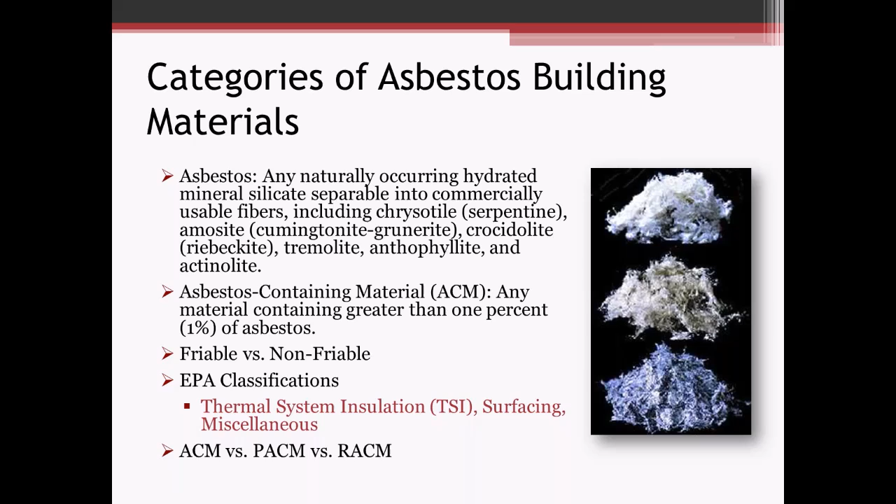It's bagged, it's transported in sealed containers, but a lot of times it goes to a landfill that you're going to have C&D waste as. Whereas your regulated asbestos-containing materials, that friable material or materials that could be or will be rendered friable, that goes out as a whole separate entity, and usually a higher cost associated with that disposal because there's only certain landfills. You've got a lesser amount of landfills that will accept that.

So further into the regulations, the background on asbestos materials, rules and regulations that exist out there. I'm not going to go too in depth with what is there, but as you can see on the federal side, we have AHERA, the Asbestos Hazard Emergency Response Act. That pertains primarily to K through 12 schools and dictates how K through 12 schools need to manage their asbestos,

develop asbestos management plans, periodic surveillance, triennial inspections to make sure that if they do have asbestos materials in their buildings, they're being maintained, they're not damaged, they're not deteriorated, they're in a condition that you're not going to have exposure to the occupants.

NESHAPs, the National Emission Standards for Hazardous Air Pollutants. That's the EPA regulation for managing asbestos. So that talks about how to abate your asbestos, how to handle it, how to dispose of it, setting up inspections, all that criteria would fall under those NESHAPs. Then finally, on the federal level, OSHA has their regulations.

The interesting thing to point out here, as I mentioned before, with the trace asbestos, OSHA does have some protocol out there. They don't really distinguish between how much asbestos you have. If you do have asbestos in your material, the regulations should still really apply there. Whereas the other ones, we're looking at that greater than 1%.

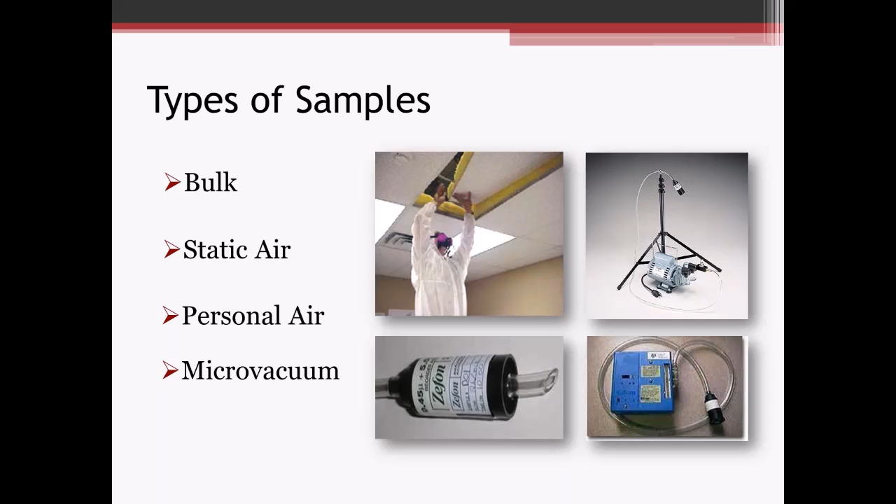The trouble with a micro vacuum sample is, as opposed to the other samples where you have number values, this is basically a presence absence. If you have a presence, then you may have an issue. If you have an absence, then you're good. But if it's present, it's more of a qualitative analysis or quantification. So that'll bring us to question 1.

Okay, Cheyenne, go ahead. Okay, so this first question should be, what is asbestos-containing material? And if you answered B, any material containing greater than 1% of asbestos, then you are correct and well on your way for passing this course.

Okay, so moving into an incidental disturbance. So what do we talk about as far as an incidental disturbance? The definition here is the unintentional disturbance of ACM, PACM, or asbestos material. It doesn't really matter how the disturbance occurred. It's a matter of if you've got disturbed material, you've got potential debris, potential fibers in the area, that represents a concern, especially in the building. You've got building occupants that may be in the area affected. You need to do something to address those conditions.

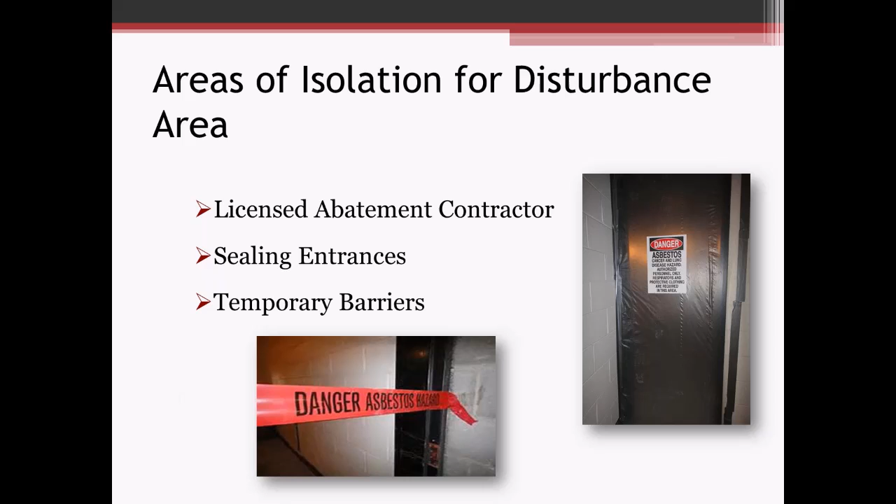So how do we assess these incidental disturbances? At a minimum, you need a visual assessment. You need to know what occurred, evaluate how it may have occurred, where that debris may have impacted. Just visually assess that area and define your extents based on where debris is present. This needs to be done through a certified building inspector, certified through New York State Department of Labor. These are the same people that would do the surveys, do sampling, do assessments. They're the ones that have to go out there and do that visual assessment.

They're going to visually identify the extent of that debris, and they may also establish a sampling plan. So if it's not necessarily a cut and dry, yeah, we see debris here, we're going to close off this room, clean up the whole room, and do it that way. If it's a large warehouse area and they want to maybe limit it to a certain area, they may look at doing some bulk samples, air samples, to say, okay, we can contain it to just this 100 square foot area and not have to shut down the whole operation in that area.

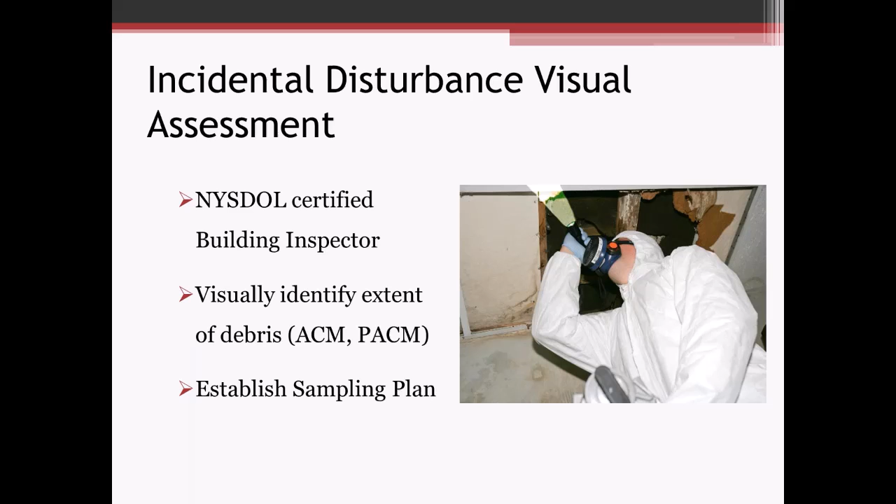You're kind of left to considering that all as asbestos area and abating the entirety of it, just because there's so much going on there, and you can't really tell for sure if this is current, old, historical, whatnot. So bulk sampling isn't useful in every situation, but in a lot of situations it can provide benefits to limit your area of disturbance.

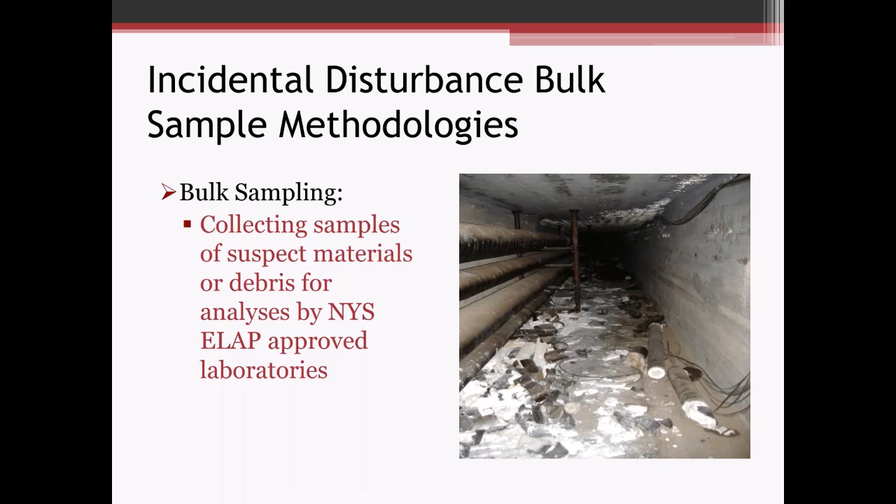You can also consider micro vacuum sampling. This would be a little more common if you're in like a commercial office type setting where you don't have a lot of debris, where you can get bulk debris samples. But you do want to show that you've done a thorough assessment. You've sampled surfaces to indicate, yeah, we do feel the debris is contained here. We've got this data that shows we did some sampling around the area and we're not seeing anything there. So we feel confident that if we clean up this area, we've taken care of and addressed the situation.

And what you're doing with those micro vacuum samples, you're using horizontal surfaces. We're not sampling vertical surfaces. We're concerned with where dust might settle out. So we want to look at those horizontal surfaces. And then also maybe you're selecting representative intervals, whether it's 1 foot out, 2 foot out, 5 foot out, different directions, depending on where you want to establish your extents of contamination. If you've got a wall in one direction and it's 2 feet away, it probably doesn't make much sense to sample in that direction. You can use that wall as your barrier, and that'll be part of your work area when you set up your containment.

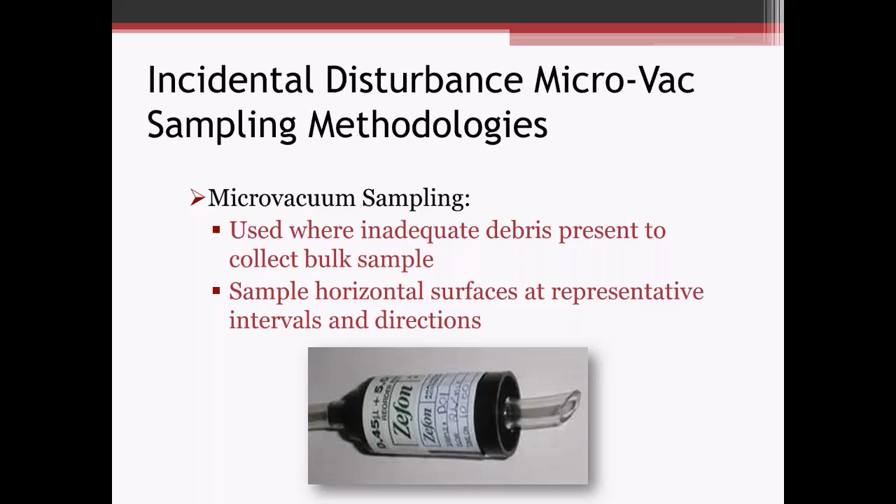The other sampling that can be done is some static air samples. Now, aside from what we had talked about earlier, which is the bulk, the building inspector would do all those previous bulk sampling and visual assessment. These static air samples, if you do decide or elect to do this as part of your assessment, you do need a certified asbestos project air sampling technician to collect those samples. A lot of times, if we're doing the air sample, we're looking at doing 5 air samples within the area of concern, 5 air samples outside the area of concern, and then we do the TEM analysis, the transmission electron microscopy.

What this number gives us is flexibility. This is typical for what you would do for a large project area type clearance, 5 air samples in and out. So that allows us, if we do end up with a large incidental disturbance, okay, we collected 5 samples in and out. It justifies that we did due diligence. We didn't just collect 1 sample and call it a day if we do decide to do that air sampling.

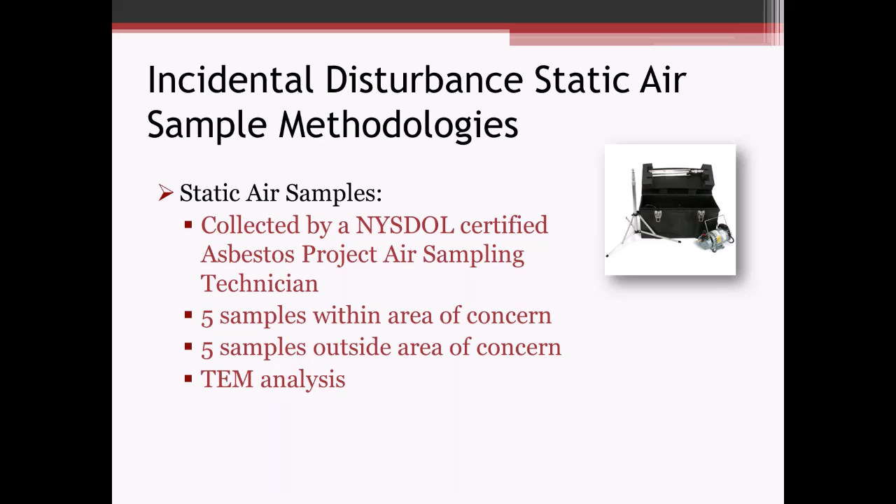And then that TEM analysis, the value of that is the laboratory can analyze specifically for asbestos fibers. They're not going to be counting fibers that might be non-asbestos related, whereas another analysis, the PCM analysis, would count all fibers in a certain range. Whereas this one says what we analyzed and told you for those counts is asbestos. So you're dealing with asbestos if it's detected there. And if it's not, then it allows you to say, okay, we're looking pretty good as far as the air quality in those immediately sampled areas.

All right, so that brings us to question number 2. Go ahead and continue, Cheyenne.

Okay, thank you. Question number 2 is who performs the visual assessment to identify the extent of debris from an incidental disturbance? And that answer would be C, the New York State DOL certified building inspector.

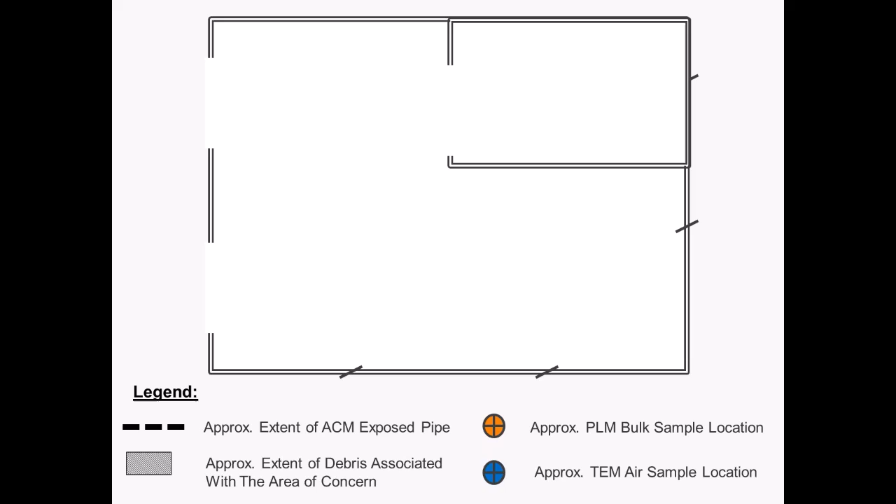All right, so to kind of show a graphic of what we just went over as far as how an assessment generally occurs, here's a scenario where we have a room. Say in this room we have an exposed pipe that has ACM on it, so this would be something with pipe insulation.

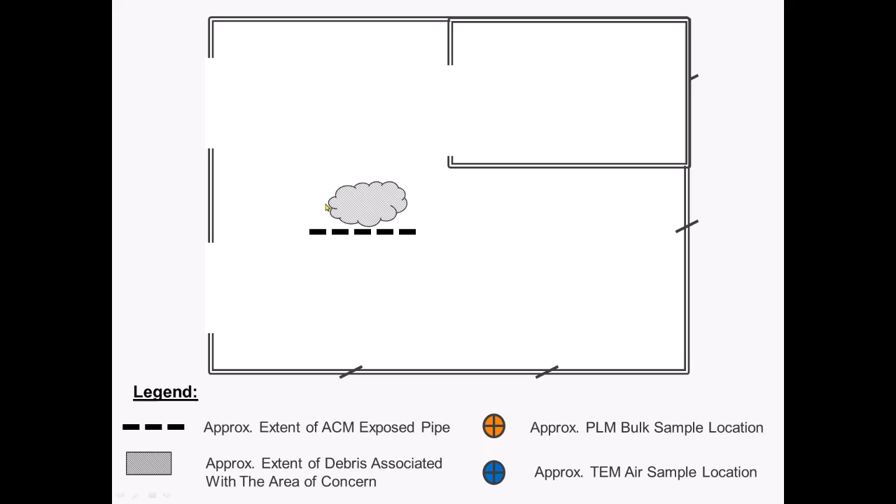And then we're going to say something occurred, an incidental disturbance, and we have some debris. Visually assess it. This is kind of where we're seeing all the debris had landed. It's a large room, so we're looking at defining the extent of contamination, not having to clean up this entire area. Maybe we can just worry about this area. So going out, collecting some bulk samples at specified intervals in each direction, to determine if we've got any debris laying around this area that we can't see.

And then doing our air samples. In this scenario, these are our 5 inside the work area air samples, and then the 5 outside the work area air samples. As you can see, we're deducing that we may be limited to just here. So these are our inside work area air samples, and these are the outside. Now, if for some odd reason our area ends up being way out here, these end up becoming inside work area samples, but you do have to make some sort of judgment and determination when you're out there to select your locations anyhow.

So we send these samples to the laboratory. A lot of times we're going to tell the laboratory, let's analyze these bulk samples first and analyze our air samples, see what we got with those before we start looking further outward. Say our laboratory comes back and we got hits on these 2 bulk samples, all our airs are clean, these other 2 bulk samples are clean. So then we go back to the lab and say, we're still kind of up in the air on these direct locations. Can we also get these 2 samples analyzed?

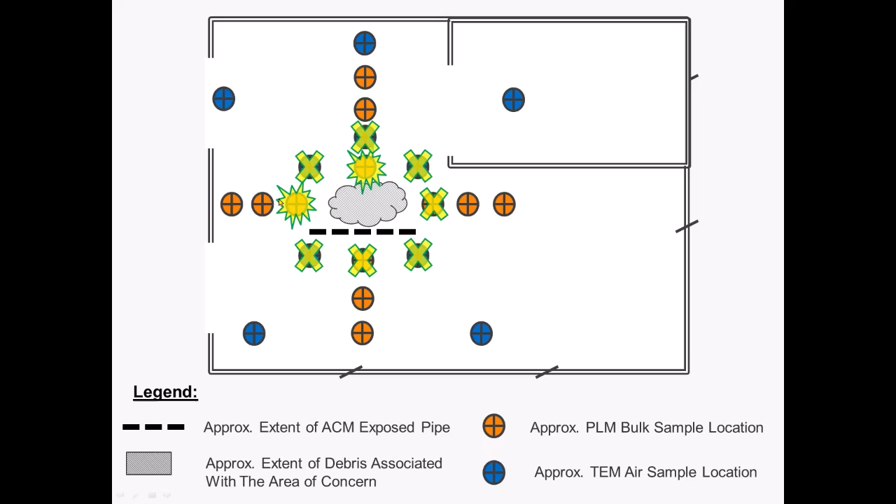Get those analyzed, those come back clean, great. We've established our extent of contamination. We can tell the owner and the contractor, look, this is what we're looking to clean up. This is what we're going to put in our variance to clean it up. And then we can proceed with that extent of contamination.

Now, again, if this wall is pretty close, more than likely it may be easier just to extend your work area here rather than try to set up a containment barrier here. You can actually use this wall system. That little extra to clean up probably isn't going to make or break anything. So again, use your best judgment and work with the owner to see what makes sense to do for a cleanup.

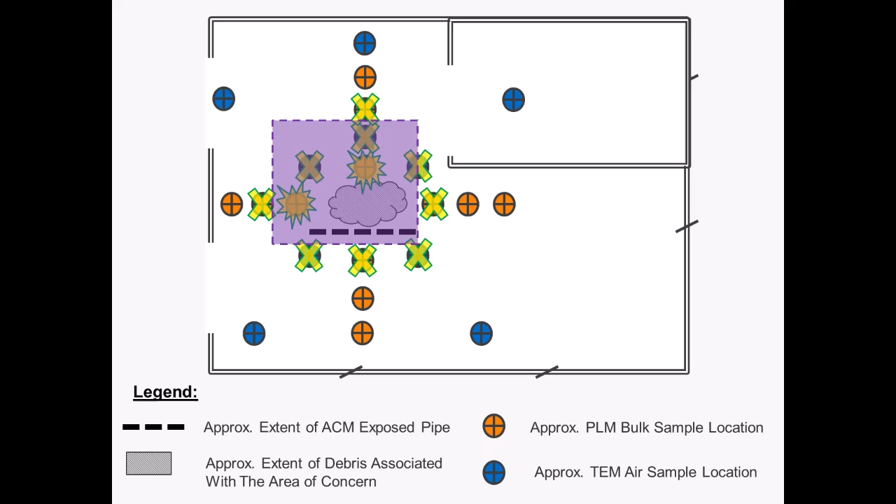So when we transition into, okay, we've done the assessment, we know what we're going to have to clean up and where, now we've got to look into, do we need a site-specific variance? As far as the applicability of a site-specific variance, if you look at Code Rule 56, any person or firm subject to Code Rule 56 may petition the Department of Labor for a site-specific variance from limited provisions of the Code Rule on the grounds that there are practical difficulties or unnecessary hardship in carrying out those provisions. In other words, anything you're looking to do on a site that isn't totally compliant with Code Rule 56 requires a variance.

When we're dealing with incidental disturbances, it is typically required. The only scenario where it isn't is a minor incidental disturbance, because Code Rule 56 covers how you address a minor sized incidental disturbance. A minor sized area is 10 square feet or less. And with incidental disturbance, we're not dealing with the amount of material that was disturbed, we're dealing with the extent of impact from the debris. As you can imagine, 10 square feet isn't a very large area. A lot of times these incidental disturbances exceed that 10 square foot minor size criteria, so there is a requirement for that site-specific variance.

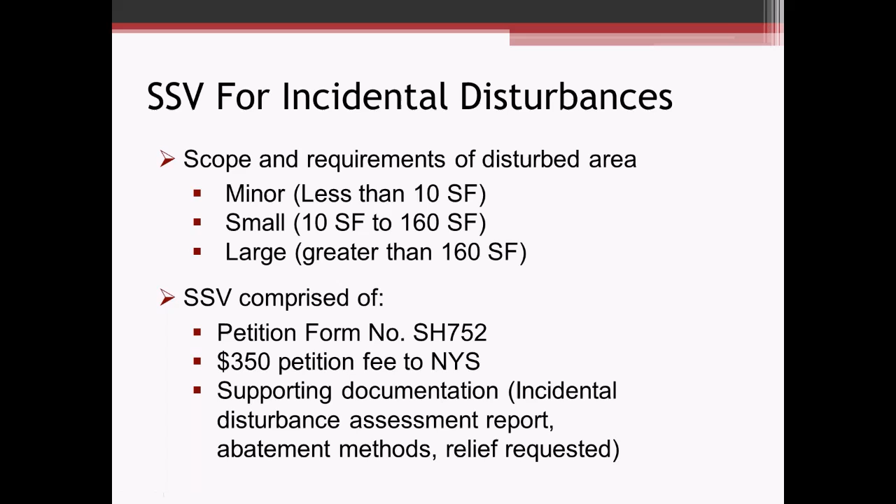And then if you have any supporting documentation, as you'll see on the next slide with the form, there is limited room to explain everything. So a lot of times you're going to have additional add-ons, whether it be the incidental disturbance assessment report, abatement methods laid out more specifically, or a description of the relief being requested. That might be provided in supporting documentation.

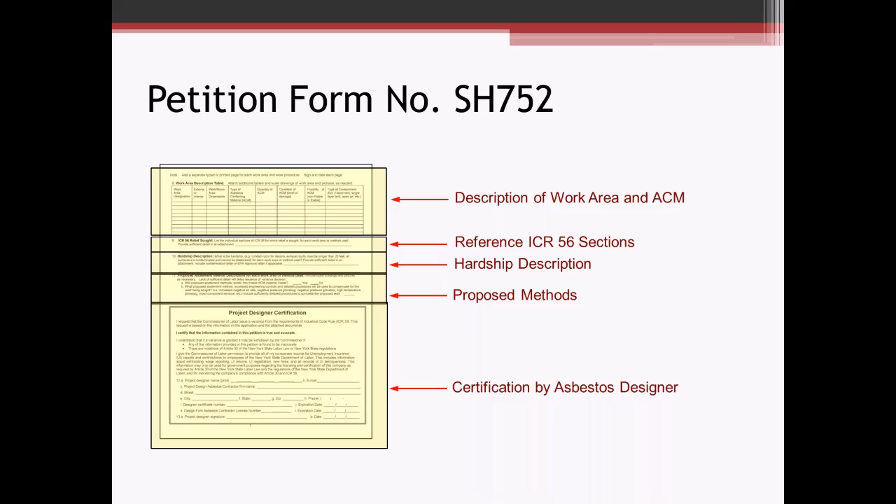What your proposed methods are. Again, limited room here; you're probably going to see this on a separate sheet. This is what we're looking to do. Lay out the abatement process for them so they can see you're using practical methods and means to accomplish the cleanup. And then your certification by that asbestos designer, with the license number, cert number, and all that to verify that they are a certified asbestos designer.

And that brings us to question number 3.

Continue, Cheyenne. Okay, so question number 3 was who reviews and approves petitions for asbestos site-specific variances in New York State? That was on one of the slides. I believe I forgot to specifically state it, but it was there. So if you got it right, kudos to you. That is D, the New York State Department of Labor Engineering Services Unit.

Okay, so when we submit that site-specific variance, it goes to the New York State Department of Labor, that engineering services unit. They'll take a review of it, they may have questions, clarifications. They may make additional conditions on the variance itself. Generally, when you're looking at an emergency variance, usually they come back within a day or two. I rarely see them come back beyond a 3-day period now. It's usually the same day, next day, or maybe the day following. So they are pretty proficient at getting those emergency variances reviewed and out the door.

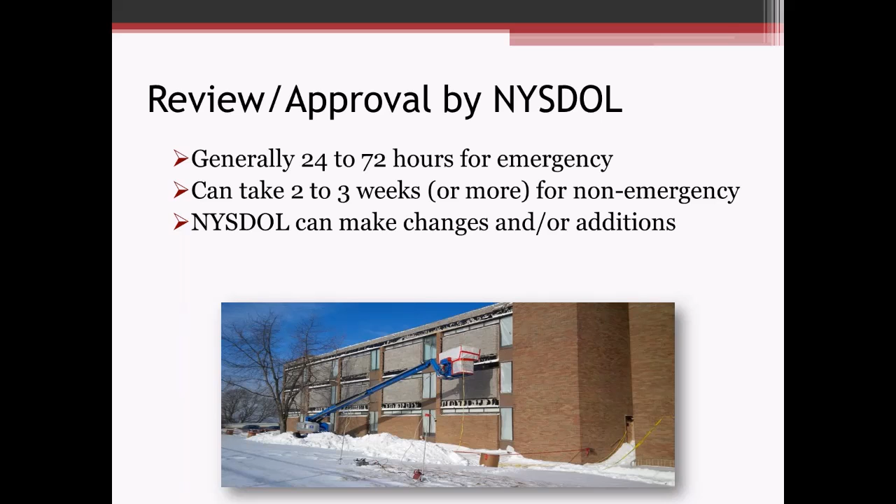The Department of Labor can make changes and or additions, so a lot of times with certain variances, they'll add conditions to it. When they add those, those become part of the variance and they become applicable for compliance. So you want to make sure when you receive your variance back, you read and understand what additions or changes they may have made, and make sure you can comply with those. Or if maybe they have a misunderstanding, get on the phone with them and say, hey, I know what your intent is here, but we really can't practically do that, and that's why we didn't include it. So there's opportunity to go back and revisit that.

And then a change or modification: once you do have an approved site-specific variance and something comes up during the project that wasn't known or fully clear ahead of time and included in that original variance submission, you can amend a variance. You can submit an addendum to the Department of Labor, and they're pretty good about amending those, provided it is pertinent to the work that you're doing and what you originally submitted on. They're not looking at amending a variance for a totally different area on the other side of the building, but within reason, they'll grant you amendments as the work progresses.

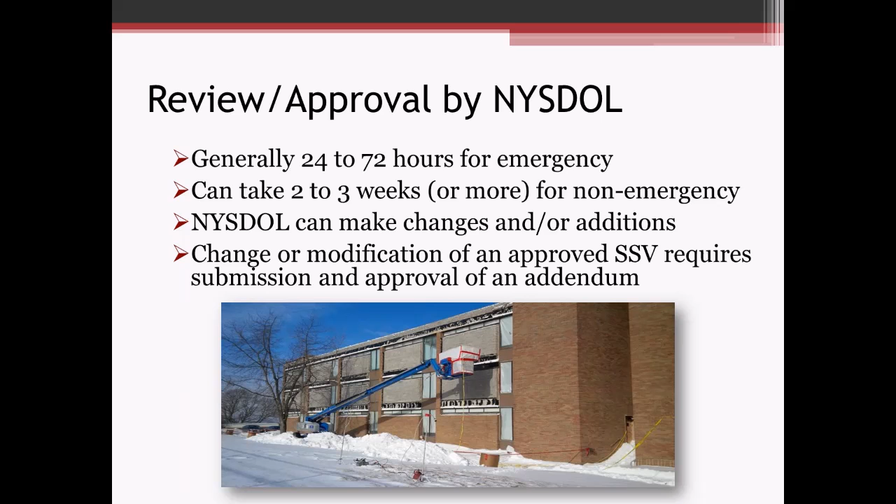Then once you do get your site-specific variance, as with any abatement here in New York State, it needs to be performed by a licensed abatement contractor. So that should be no surprise. You've got to have the licensed personnel doing that work. It's pretty clearly stated there.

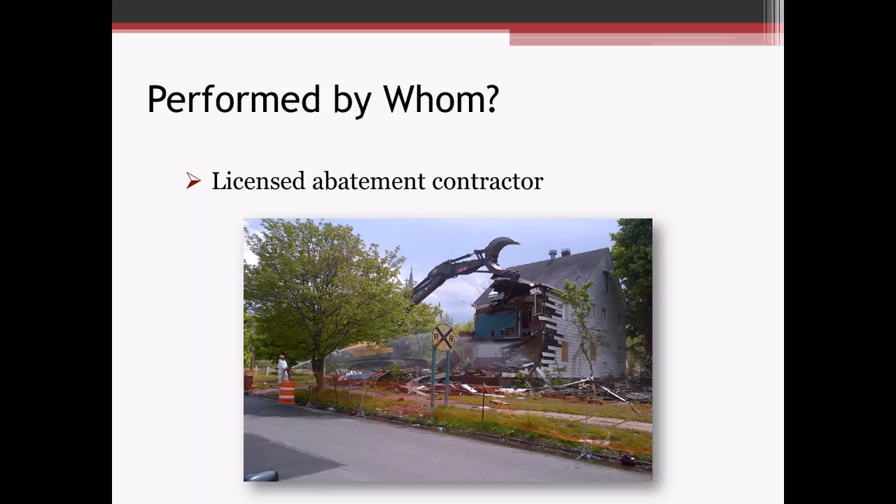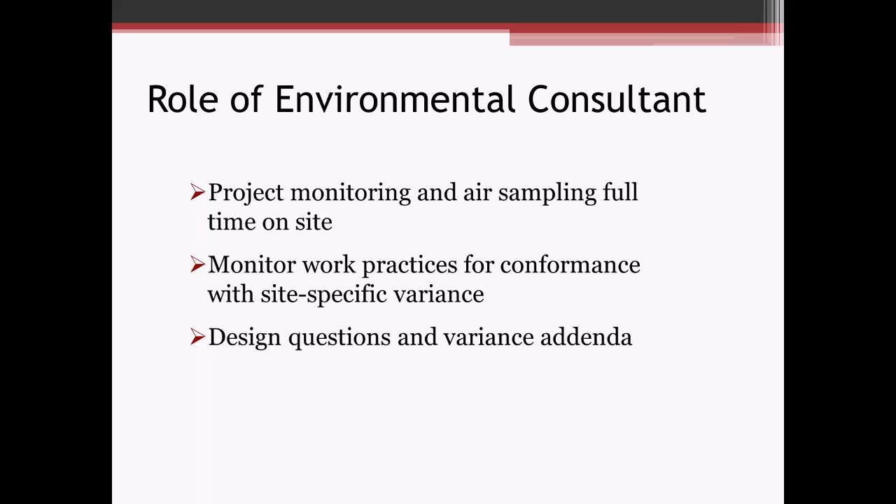You often have an environmental consultant or a third-party monitor firm that will work with you on the project. Their role is primarily project monitoring and air sampling during the work. Most variances will require a full-time on-site project monitor to oversee the conditions of the variance and make sure things are being carried out as stated in the variance or as applicable to the Code Rule 56 requirements. They also will monitor work practices for conformance with the variance conditions. Also, if there are any design-related questions, or if you need to prepare an addendum to the variance, they can be on hand to do that.

Now, aside from site-specific variances, there are also a few other types of variances in Code Rule 56. One of them is what's called applicable variances, and really these are an add-on to the Code Rule 56 document. They were items so common that, rather than continue to put out site-specific variances, they amended them into the Code Rule 56 document, so anyone who wants to use them can use them. There are 4 existing, one being controlled demolition on a municipally owned building. It allows you to demo with asbestos in place for buildings that are in disrepair.

The second one, AVA2, is your negative air ventilation exhaust. This allows for extended length of negative air exhaust. Sometimes you're in a condition like a crawl space where you can't easily access the outdoors. You don't have windows, you don't have doorways, so you might need to extend the length of that above what the code rule allows to begin with. So that applicable variance allows for that.

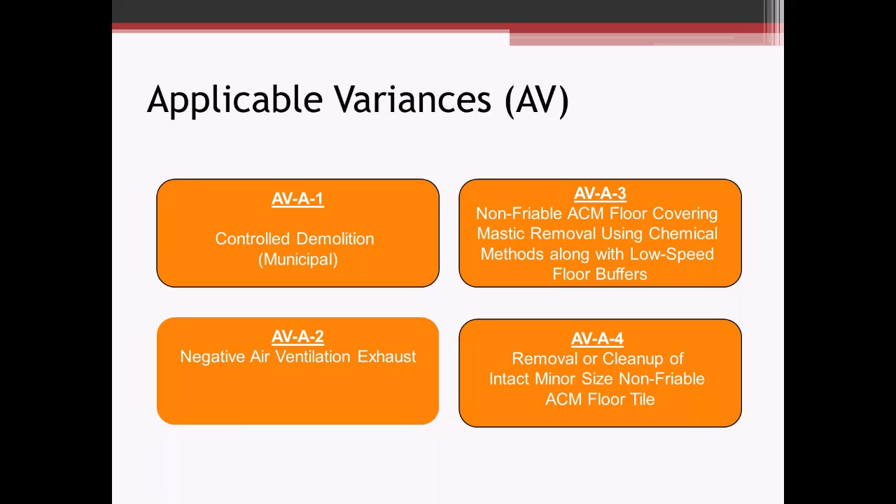...pending certain conditions. AVA 3 is for non-friable ACM floor removal, mastic removal using chemical methods along with low speed buffers. AVA 4 is a removal or cleanup of intact minor size non-friable asbestos containing floor tile. So again, anybody can use these applicable variances provided they're following the conditions that are set forth in there.

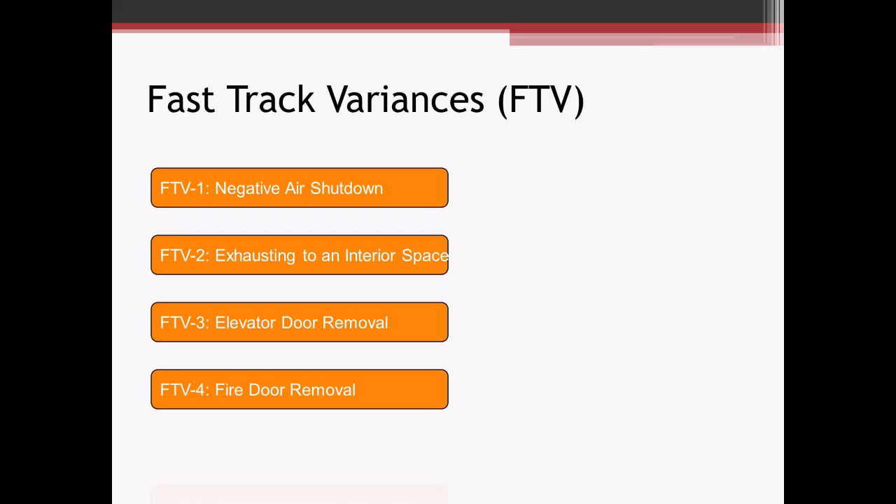Another thing that's a recent phenomenon here with our Department of Labor in the Code Rule 56 stuff is what's referred to as fast track variances. These again were things that were so common that they want to be able to push these through a lot quicker, a lot more efficiently. Right now we have 10 of them that the Department of Labor developed. And the reason for having these as fast track variances and not just putting it in the code rule is it's easier for them to do it this way than to try to go through the legislative process to get things amended and added on.

So this process allows someone to submit the normal site-specific variance petition, but you just reference the fast track or the multiple fast tracks that you may want to use. So if you want to use, for instance, fast track variance 1 for the negative air shutdown during a project, you just say, we want to use FTV 1, submit the petition, they review it, they approve it. Now the condition with this is you have to use it as stated. You can't modify it, you can't change it, you can't add to it and submit it under a fast track variance condition. If there's any changes or modification to what's written in these fast track variances, you need to submit it as its own separate site-specific variance.

So just to run through, not going to go into too much detail on what these are, but there's one for negative air shutdown. Fast track variance 2 is exhaust into an interior space. If you don't have access to the outside, it allows you to do that with some air sampling criteria. Elevator door removal, fire door removal processes. Crawl space with a dirt floor. There's a lot of conditions with that, especially with trying to get a clearance. You can't really use aggressive air samples, so that allows you to do sampling non-aggressively. Intact component removal, buried cementitious pipe. So you're outside, you encounter some buried pipe, asbestos containing material. You have a fast track variance that you can apply for and get that done quickly.

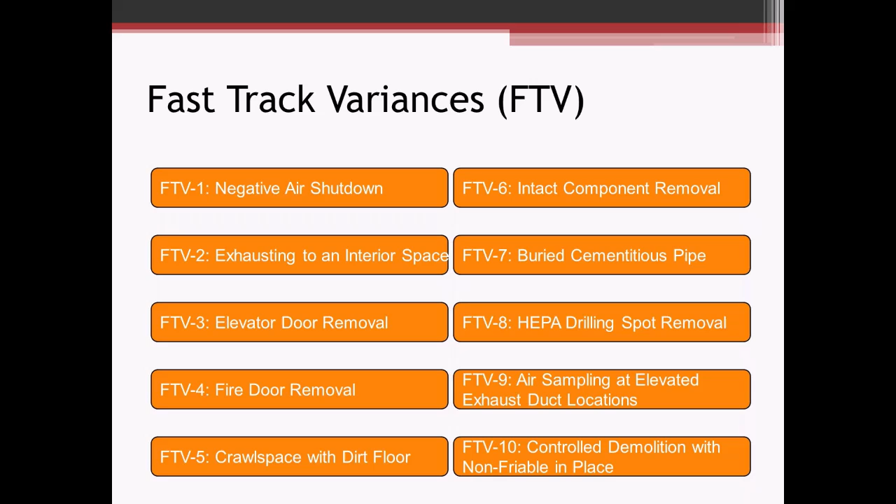Number 9, air sampling at elevated exhaust duct locations. So if you're doing air samples on a high-rise building, this affords some relief from having to get right next to that negative air exhaust. And then the last one, controlled demolition of non-friable in place. So those are the current ones. There's some other ones that they're considering as well, but these do go a long way to help speed things up, make things a little more efficient.

Some other common applications of site-specific variances, you might see some hardships. If you can't shut down electrical service, in certain industrial processes, things like that, you might need a variance for that. Size restrictions for decontamination units, you just don't have enough area to put what you would need for a large size project decontamination unit, so you could get a variance to do a small size and still be able to access your area without too much trouble.

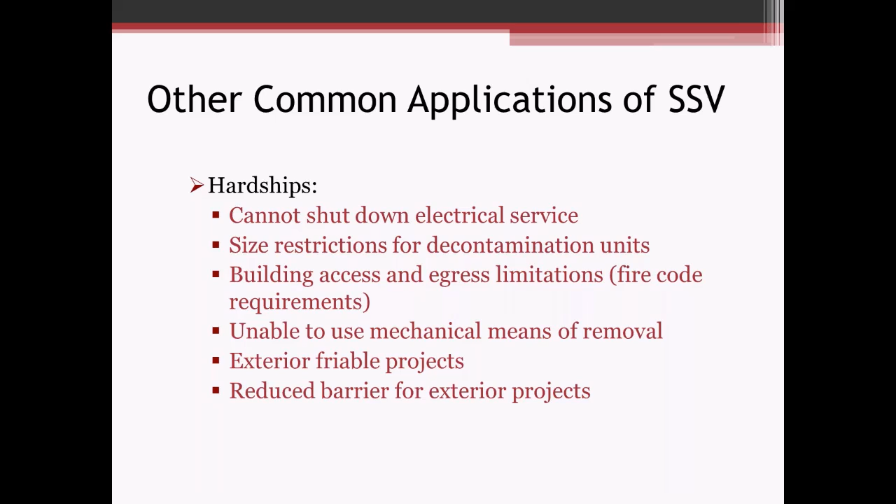Building access egress limitations, unable to use mechanical means for removal. If you have an exterior friable project, you're probably going to want some different relief there. And then reduced barrier for exterior projects. So if you're in an urban setting and you can't fully meet that 25-foot requirement, you might need to reduce it down and then add some air sampling at that reduced barrier, so it doesn't force you to talk to the neighbor and take half their property when you're setting up your work area.

So with that, our final question, number 4 here.

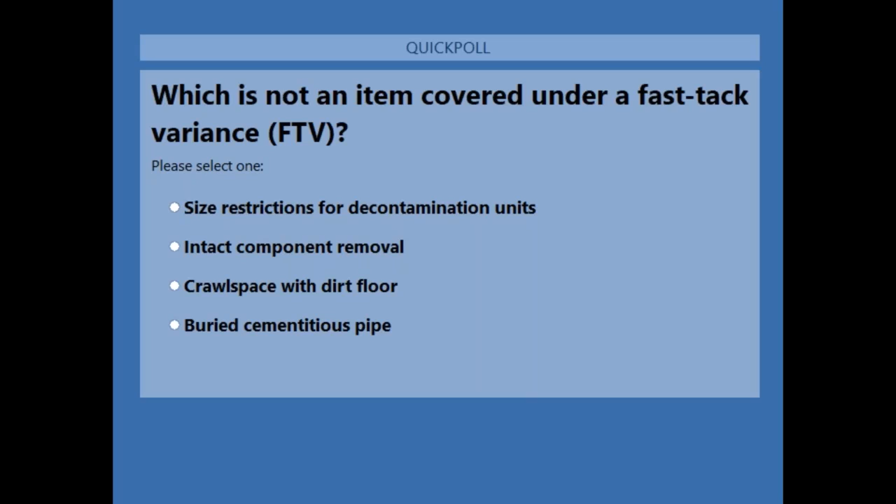You can continue, Cheyenne. Okay, question number 4 was which is not an item covered under a fast track variance? The answer to that would be A, the size restrictions for decontamination unit. All the other ones are among the 10 fast track variances.